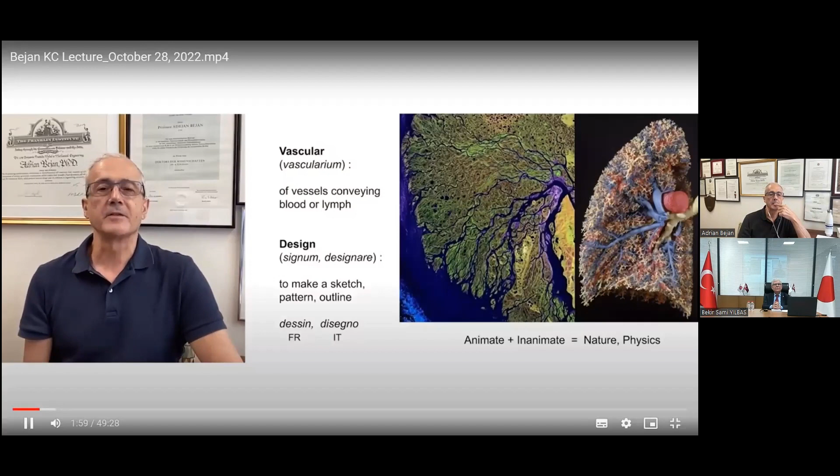The two photographs on the right make the point that the vascular design is at all scales that we can perceive. The river delta and the human lung convince us that vascular design is everywhere. And because of this, vascular design is uniting the animate with the inanimate. And this means that vascular design represents all nature, which means physics.

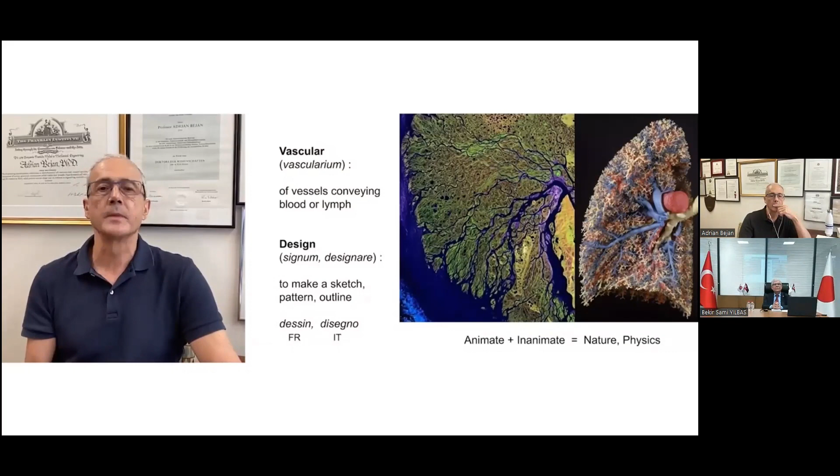A few words about myself. All research, especially the original one, is autobiographical. My own involvement in porous media research has been a series of very fortunate accidents. I spent 8 years at MIT as a student. In my graduate work, I was designing and building and testing a superconducting winding that was bathed by flowing liquid helium and also rotating at 3600 RPM. You see a sketch on the right.

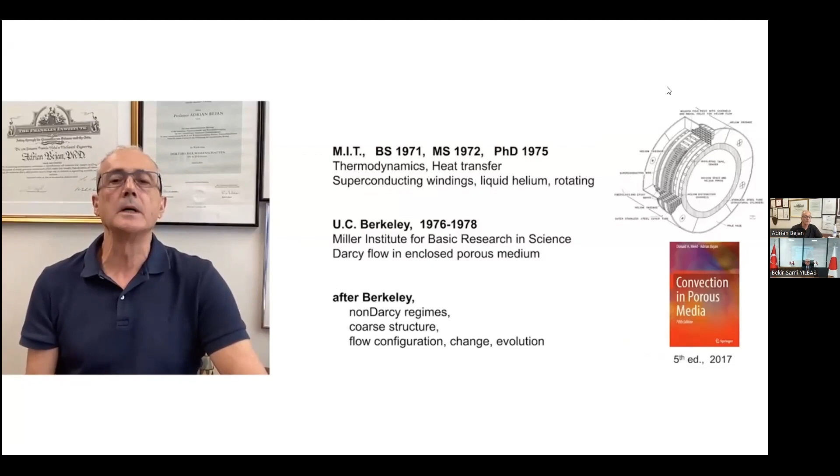2 years after that, as a Miller Fellow at the University of California, Berkeley, I had the great fortune to be hosted by Professor Chang-Lin Tien, who introduced me to the science of flows through porous media, specifically Darcy flow. And then after Berkeley, I continued in that direction with fundamental studies on other regimes, non-Darcy and higher Reynolds number, and also porous media with coarse structure.

I found myself attracted by the importance of flow configuration, which means design, and the evolution of that in the direction of endowing the system that relies on flow through porous media to have greater performance.

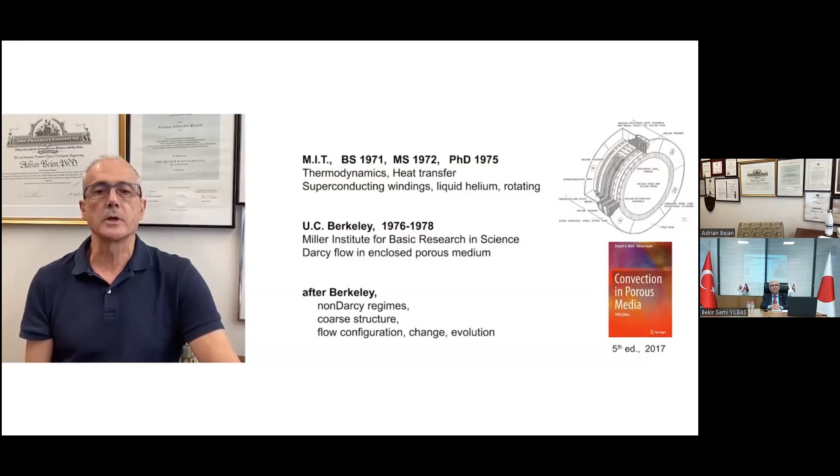Along the way, with Don Nield in New Zealand, we actually wrote this book called Convection in Porous Media, which now is in its 5th edition.

One example from my beginnings in this domain has to do with natural convection in partial enclosures. It's called partial penetration of natural convection. You see here two things: the orientation of the system matters, but also the aspect ratio of the system decides whether the entire body is penetrated by flow. That means the performance of this cooling flow is dictated by the configuration, not only by the properties of the porous medium saturated with flowing fluid.

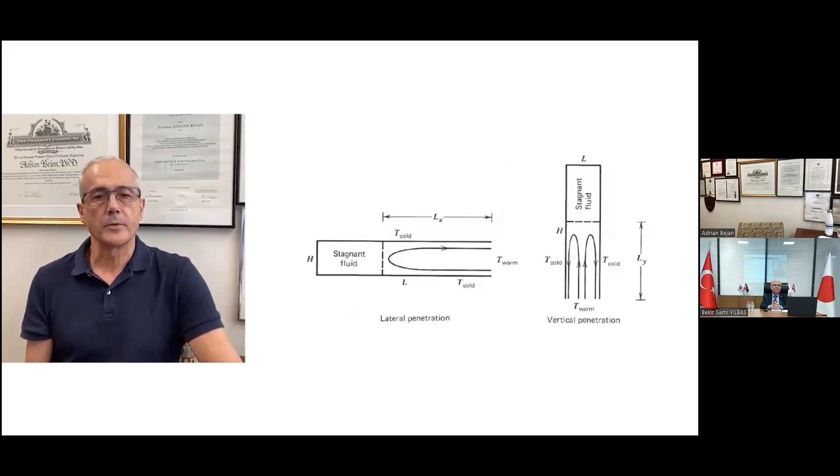Speaking of autobiography, I'm amused to remember that I made this drawing, the one that looks like the eyes of the cat, with India ink and with many French curves, meaning by hand, not by computer.

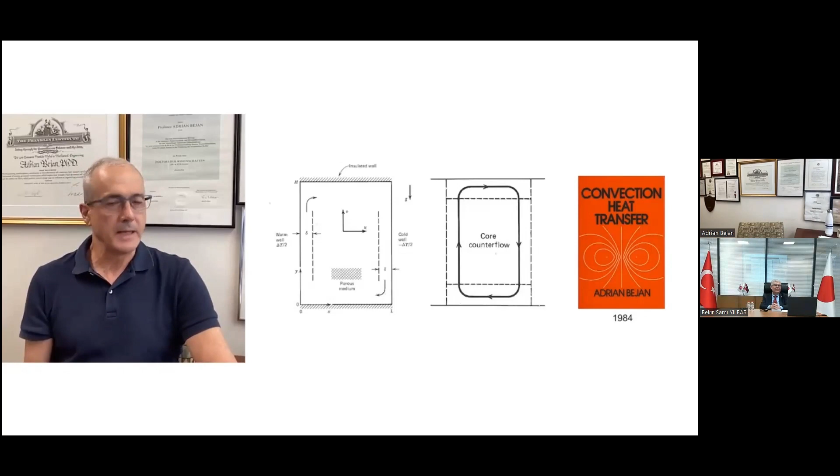Now, the real story. Predicting design evolution, once again, begins with the meaning of the words. To predict, one needs a reliable mental viewing, called an idea, of how something should be. This is very important. To know how something should be is to know the future of that something before you look at it. For that, you need a reliable principle, a law. To predict is theory, and theory is not to be confused with empiricism.

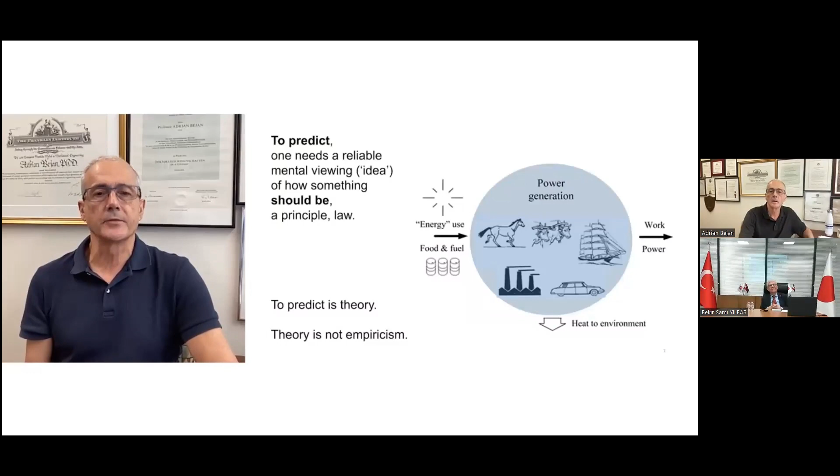In the blue domain, we have a single image review of where movement comes from: an energy source that pushes an energy current through a flow architecture. There are many of these architectures in the blue. The architecture is actually an engine that delivers work to some entity that's part of the ambient, and rejects the difference between input and output as heat.

The next part of the physics is that nothing moves unless it is pushed. So you see here the engines in the blue domain; the produced work, or power per unit time, is in fact responsible for moving something on Earth. And that movement dissipates the power. You can see the conservation of energy from left to downward in the drawing.

You don't see the second law, except to notice that the movement from left to right proceeded to a distance, that was, of course, in proportion to the work that was delivered to the mover.

The other part of the picture is that from time to time, the configurations that populate the blue domain and the green domain are morphing. They're evolving, they're changing all the time. What I sketched in the rectangular dashed box is true of everything that a human being can perceive: the air and oceanic currents, the animals and the vehicles, and many other things that appear today in neologisms such as live matter, robotics, sustainability, life, and climate.

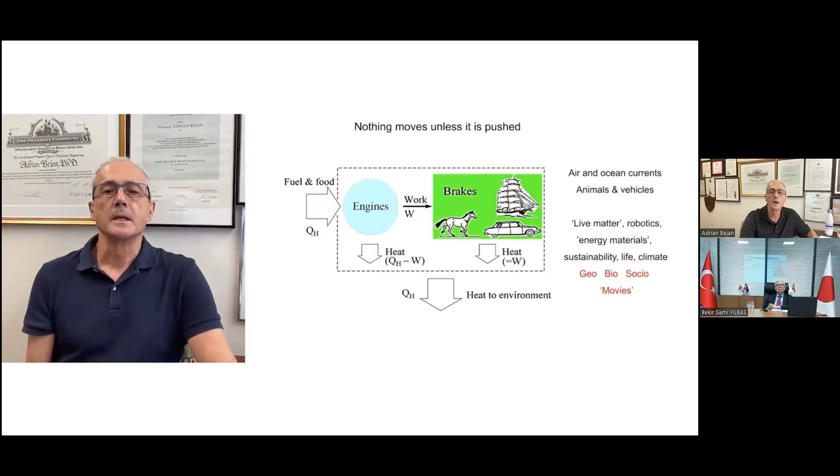This reality has a one-phrase summary, which I wrote in 1996. I call it the constructal law of design evolution in nature: for a flow system to persist in time, and that means to live in thermodynamics, it must evolve with freedom such that it provides greater access to what flows.

I illustrated this particular statement with three images from the movie of a river basin on the floor of a laboratory. From moment to moment, the tree-shaped flow changes, but it remains a tree. And from left to right, that tree flows more and more easily, which means in this particular case it is driven by gravity, by shorter and shorter peaks of sand on the floor of the laboratory.

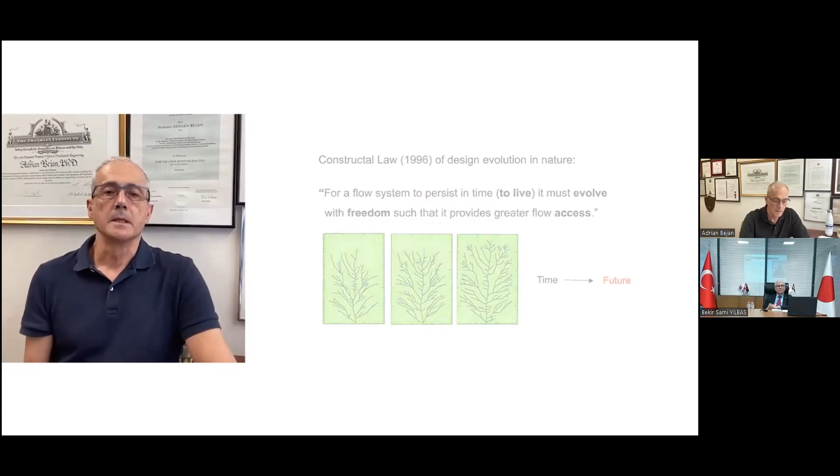With this introductory set of definitions behind us, I come to vascular design and its usefulness. Vascular design is useful because it facilitates the flow or the transfer of something that flows by diffusion on areas, in volumes, and in societies of animals and people.

And the flow, in the examples I've shown you so far, is arborescent. This point of view of how the arborescent architecture is predicted came from stating, in 1996, the problem of how to facilitate flow from one rectangular area to one point. This is the problem sketched in the upper left rectangle. The answer is by shaping the rectangle in a particular way, which happens to be the second rectangle in the column on the left.

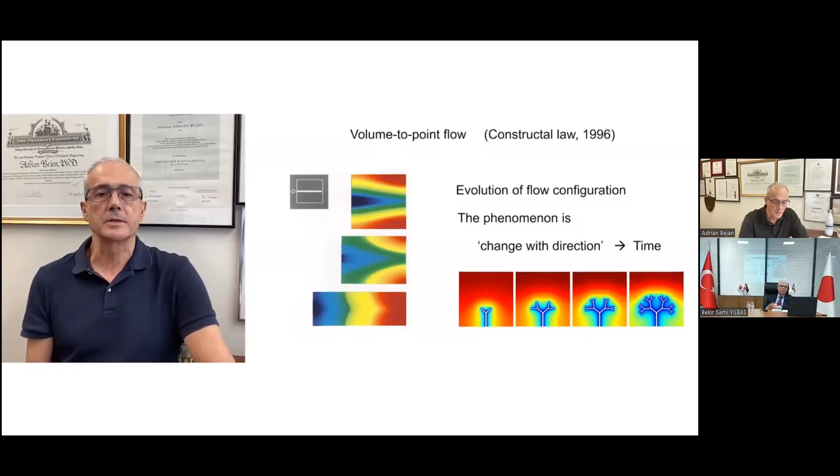The phenomenon is, once again, the change in the shape of the image in a particular direction over time. This development has been running its own movie, as you see in the lower row of images, toward more complicated arborescent architectures that facilitate flow from a rectangle to a point.

Here are a few more examples. On the left, the domain is square, it generates heat, and the cooling is arborescent—arborescent channels carry a coolant that enters through the center of the square. In the middle two columns, which show a cut through a wall that's heated intensely from the left, the cooling enters through channels from the right.

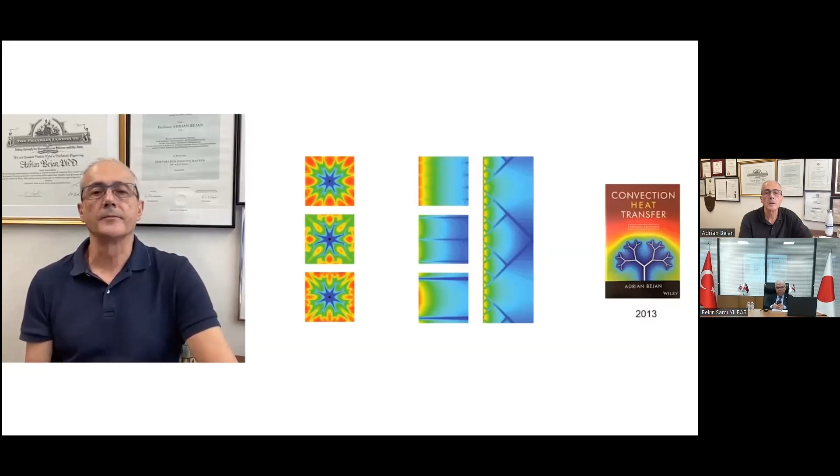In one case, the channels are parallel slits. In the other, they are tree-shaped channels. And those are arborescent architectures coming from the mind and then from computer simulations.

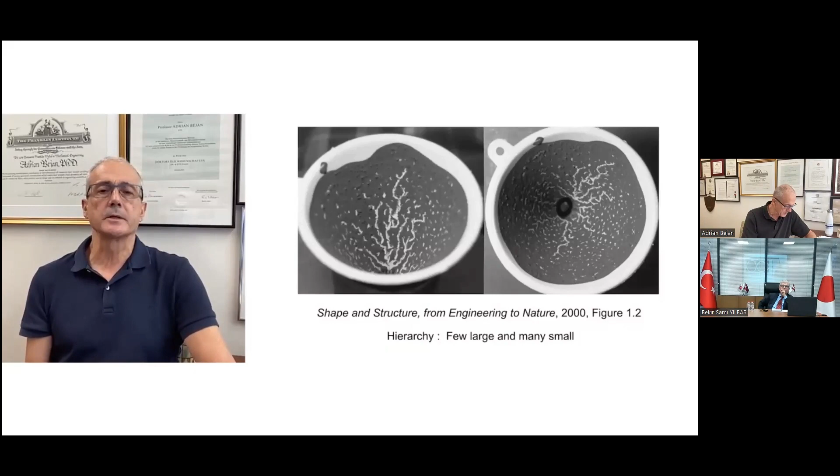You can admire these things in your own kitchen experiments. This is my own experiment in the kitchen with coffee grounds from making Turkish coffee, on the inside of a funnel. You can see that the draining of water from the saturated porous medium is accompanied by erosion, and the erosion creates an architecture that resembles a river basin.

And that is an illusion, because the original material was unknown to the flow before the flow started to erode it. However, in every single case the architectures are trees, and the principle that gave birth to every single image in this running movie is a single principle—this principle of evolutionary design with freedom.

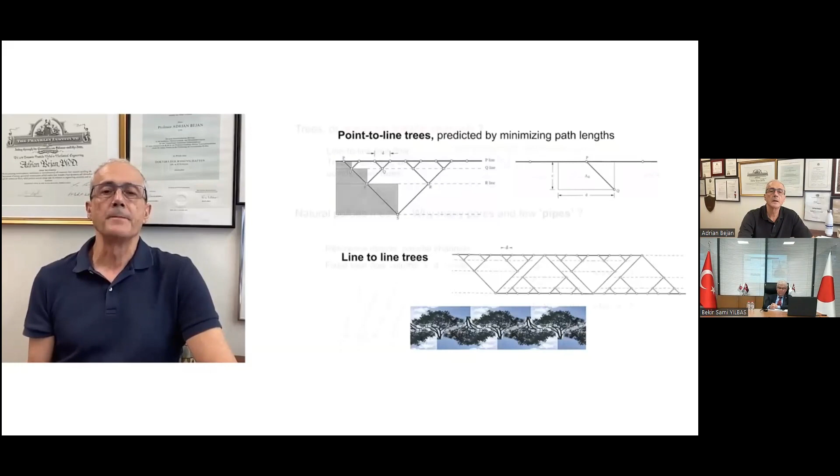If the problem is to engineer flow access between two parallel lines, then a first step toward an answer is to have the design from the top alternating with the same design upside down. This leads to the question: does the design with alternating trees offer greater access than the much simpler design shown at the bottom, which consists of parallel channels connecting the top line with the bottom line? It turns out that the alternating trees are considerably more permeable to flow.

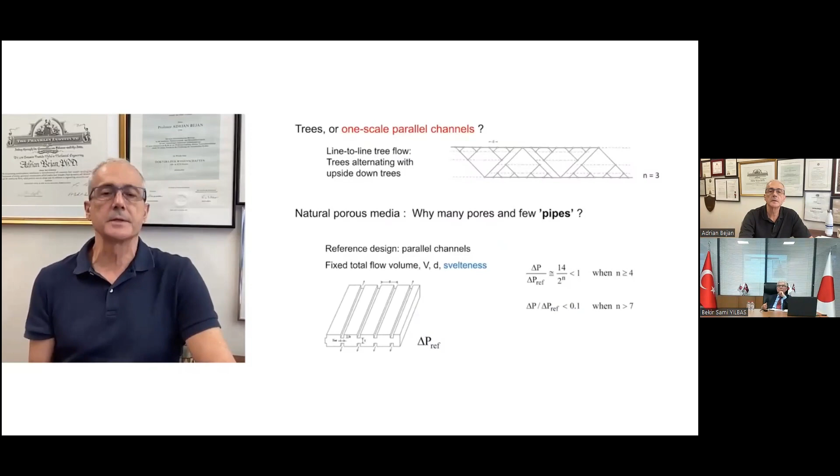This occurs when the number of their levels of bifurcation is greater than 4. Presently, in the upper drawing, the number of levels of bifurcation is 3. So the arborescent architectures are everywhere.

For example, in every living organ, such as muscle, there is a volume made by one stream entering as arterial blood and exiting as venous blood. As shown with red and blue, the body is inhabited by two trees, meaning a vasculature consisting of two trees matched canopy to canopy. Imagine two trees sharing the same canopy—that is the vascular design of the living organ.

The middle and right drawings show more of a property of a flowing design: the property of svelteness, a number that accounts for the relative thinness of the channels that carry the flow. You'll see very soon that this thinness or lightness is very important when it comes to transporting the organ on a greater system, animal or vehicle, that needs that organ.

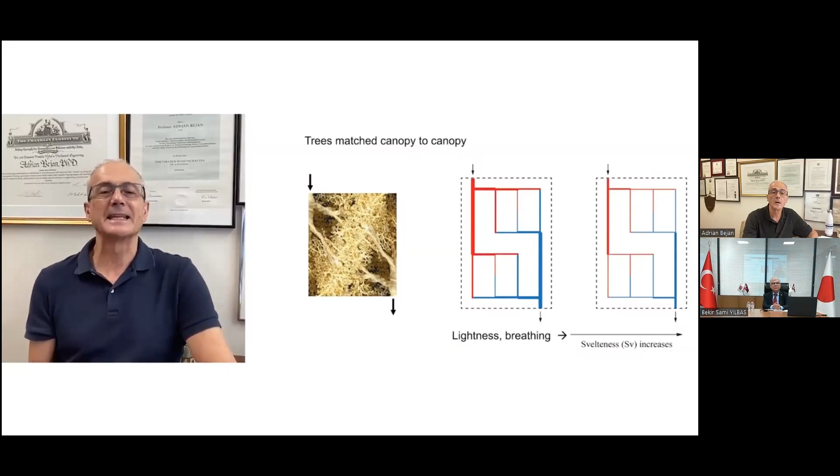Here's another benefit from getting to know vascular design. In evolution, if you read the news, there's constant surprise that species vanish and new species appear. Evolution, most of it in the imagination of the biologist, is of two kinds: gradual, often imperceptible changes, accompanied by relatively dramatic-looking changes. I mentioned that species are vanishing.

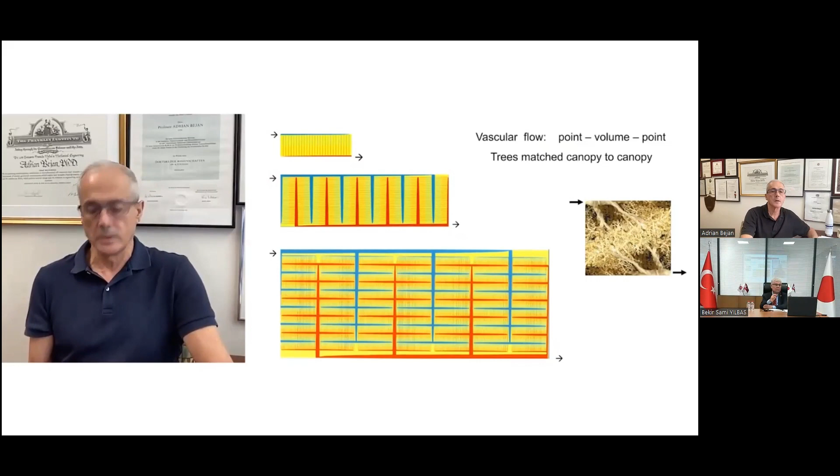Of course, in nature, these 90-degree angles between mother channels and tributaries don't happen. Those angles themselves come from freedom to change in the direction of offering greater access, and this is why the angles have relatively precise values if you know the principle of evolutionary design.

Finally, this idea could be taken with ease in the other direction, into a three-dimensional object. You can see in the middle drawing the yellow element bathed in the manner I've shown several times in the preceding slides. More elements fill a volume in the third direction, indicated in pink. Larger three-dimensional bodies are bathed by a single stream with two trees matched canopy to canopy, as shown in the construction in the column on the right.

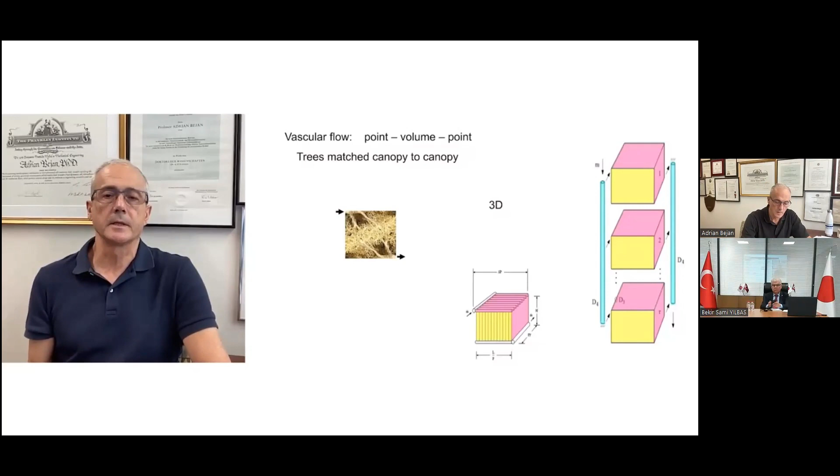Vasculature is not necessarily tree-shaped—it can be much simpler. You can imagine a body filled with trees that have a single channel. That's why I introduce you now to vascular design consisting of spacings and inserts.

For example, a body that generates heat from many plates spaced uniformly through the volume, cooled by natural convection from below. The architecture has a single degree of freedom, which is the spacing between two adjacent plates, and it also has performance.

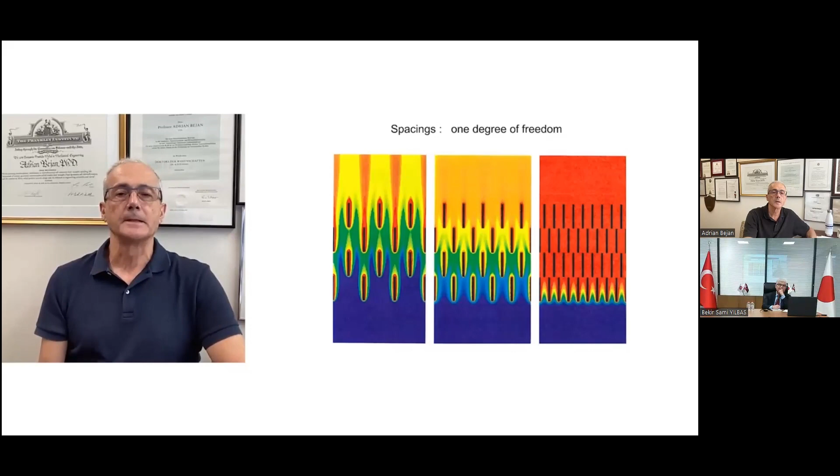If the objective is to cool the whole body, then the drawing that's coolest is the one in the middle, and that is due to the spacing, which is a single degree of freedom.

Now the principle behind the spacing, if you imagine what goes on between the plates, is that the boundary layers coating each plate do not interfere with each other—they touch only at the exit. That means the spacing is dictated by the thickness of the boundary layer, or that the length of the plate is dictated by the entrance length of the flow.

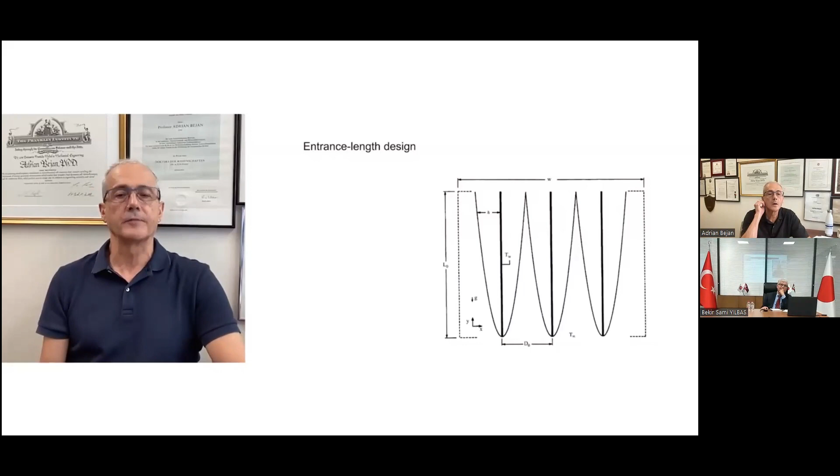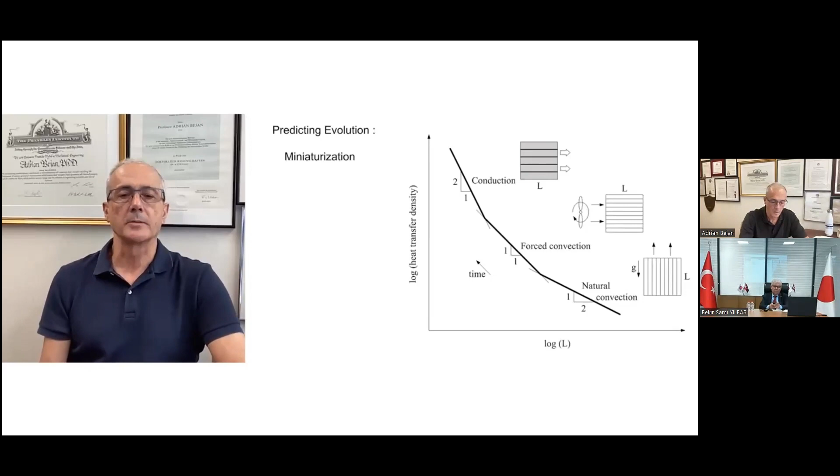Miniaturization is another name for the direction of evolutionary design in this interesting combination of gradual change accompanied, or interspersed, with dramatic changes.

Why is the designer and the user interested in smaller bodies with coarse porous structures with fluid flowing through them? Well, because once again, those organs are useful on something else much bigger: the mover, the animal, or the vehicle.

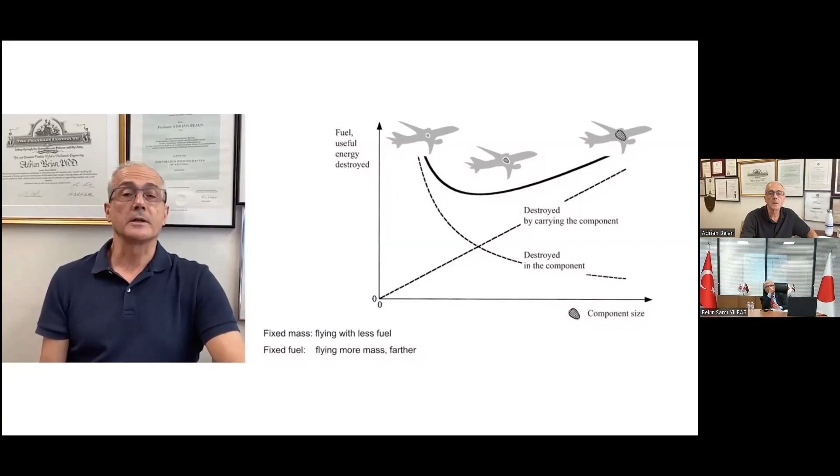Now, why is this so-called preferable size of the organ decreasing over time? Well, it does because the descending curve slides downward as one era is replaced by another. It slides downward because designs are actually improving.

For example, in technology, the flow architecture gets better if one learns that the vascular design is better than some other designs. And because of this migration of the descending curve downward, the intersection is also migrating downward, toward not only better performance, but also smaller sizes.

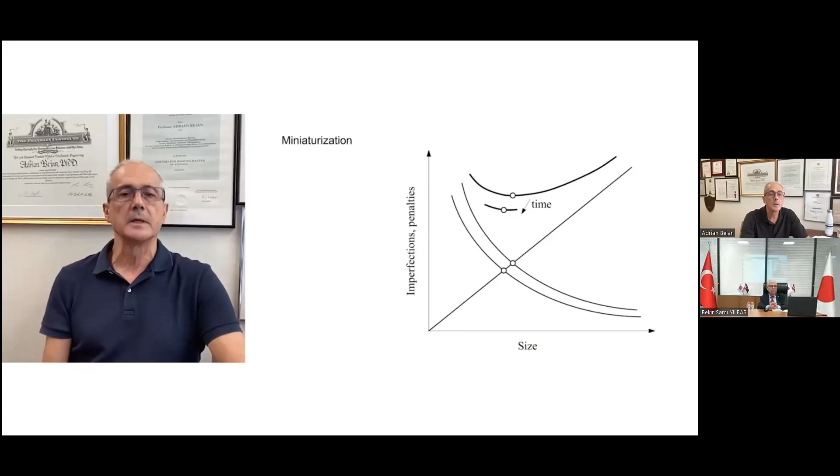So the future of a technology is in the hands of the person who knows the principle of design evolution everywhere.

The largest domain that could use what I'm sharing with you today is that of structures for heat exchange or mass exchange.

Heat exchangers are a very old—actually only 200 years old—domain, but it is of course much older in nature. Although I have to tell you that what I'm going to show you next was not copied from nature, far from it. But it's important to know that what we're discussing is in fact in accord with flow architectures that occur by themselves in this direction of evolutionary design that began today's lecture.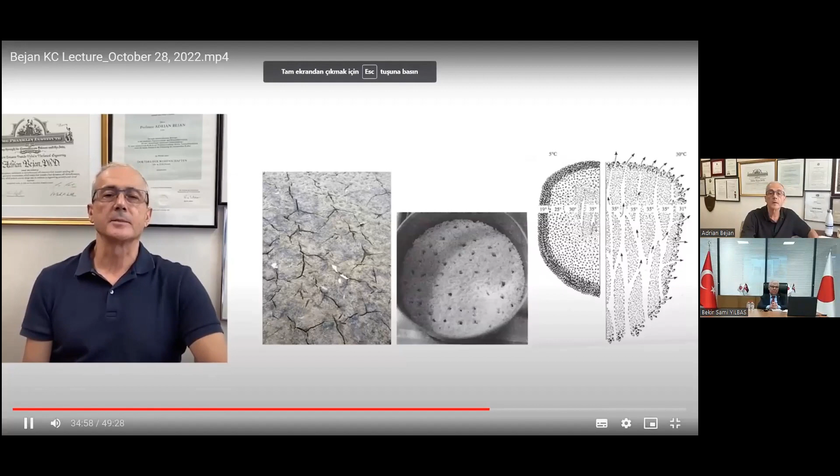Everywhere you look, you see tiny trees of cracks in the mud, and they facilitate the evaporation of water from the wet soil. In the middle photograph, you see what happens in the last stages of boiling rice, right before it becomes rice Japanese style. You see the birth of vertical chimneys that occur to channel the steam from the base of the pan to the atmosphere.

On the right, an artist's cross-section through a swarm of honeybees attached to a tree branch in India. The bees can withstand temperatures lower than 35 degrees Celsius. In the left half of the drawing, when the ambient temperature is low, say 5 degrees, the heat generated by the colony is dissipated to the ambient through heat conduction, through thermal diffusion. On the right, during a hot day, the bees rearrange themselves to permit the ambient air to rise by buoyancy through the body of the colony.

And these channels are nature's way of facilitating transfer in a body with coarse pores. In the technology of heat exchanger design, this idea has meaning: one success story led to two or three more. From left to right, the designs with one degree of freedom are accompanied by designs with more degrees of freedom, and even more degrees of freedom in 3-dimensional designs, as in the rightmost drawing of a heat sink consisting of identical pin fins.

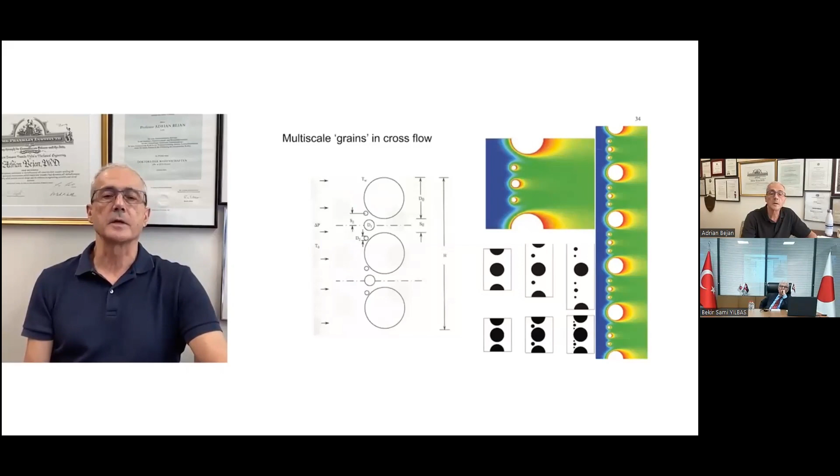Or now getting closer to the most common design of heat exchangers: cylinders in cross flow. The architecture, especially in the direction of getting smaller and smaller, looks like a multi-scale package of grains in cross flow.

Heat exchangers are cataloged, let's say historically, in images of this kind. This is from the Second World War era, primarily due to Kays and London at Stanford. The package of tubes in cross flow is complicated. In cross section, you see tubes of a particular arrangement, meaning there are many arrangements in the handbook. Each tube is covered by fins, and the fins are also an architecture with a lot of freedom to change.

The performance is summarized by those two curves. The upper one accounts for the pressure drop across the tube bank, or the appropriately defined friction factor. The lower curve accounts for the sister phenomenon, the intimate thermal contact between the coolant, meaning the fluid, and the solid surfaces. The fact that both curves descend to the right gradually as the flow rate increases reassures us that there is a so-called analogy between fluid friction and heat transfer. So this is the classical part of fluid flow and also heat transfer.

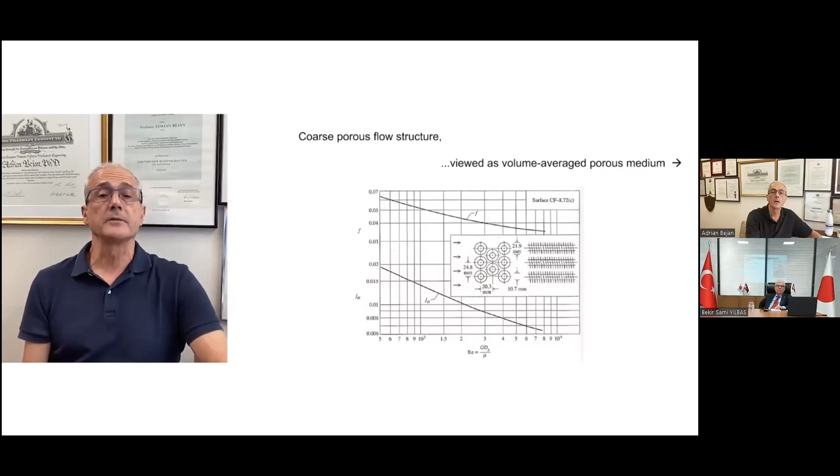It is even better known if one focuses on the fluid friction aspect, the top curve, for a single pipe with flow through it, where the coarseness is due to the fact that the inner side of the pipe is coated with roughness or protuberances of greater and greater size.

And today this is known as the Moody chart, although the data and the drawing came from Göttingen, from the Institute of Ludwig Prandtl. Prandtl is the one who made this chart famous in the first edition of his extremely famous textbook, called in English Guide in Flow Theory.

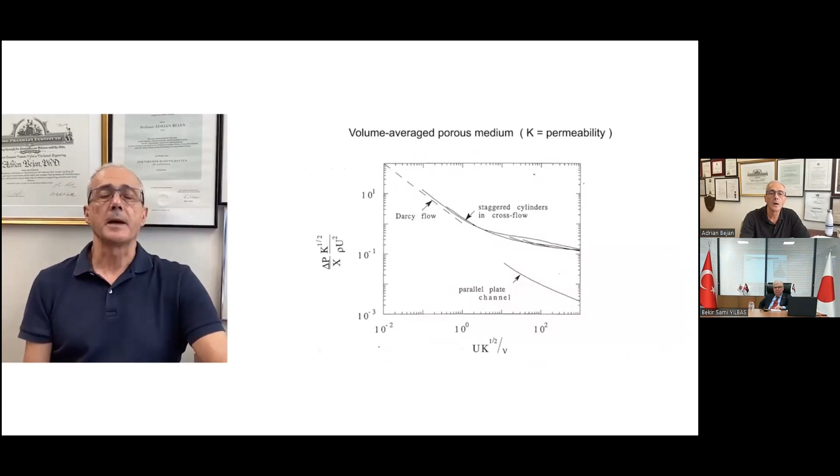Now, those of us who know fluid mechanics and how to treat it for flow through porous media can present this image, the so-called Moody chart, in a dimensionless manner, using the permeability of the porous pore structure. On the ordinate, a new dimensionless group accounts for pressure drop, and the pore Reynolds number; the upper curve is actually a bundle of many curves that account for banks of thin tubes in cross flow.

Next, the skeptics among us may wonder: why is this vascular design evolution important to me? Well, here is the answer to that. Our own life is a vascular flow through the structure that occupies the landscape.

Movement in the city is represented here as tree-shaped flows on top of such flows through the grid of the city. The grid makes us blind to the tree-shaped flow, but the crowd that converges from the city to one point of attraction, such as the basketball arena, is that river basin of human flow. At the end of the game, the same flow returns to the area as a circular, if you want, river delta.

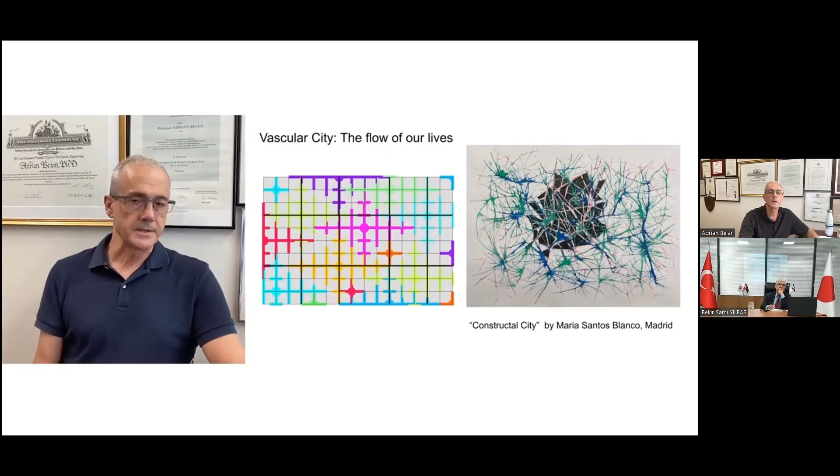This is an image of people scouring the Earth thanks to aviation. The image comes from the condensation trails left by flying aircraft. The blue shows that the whole globe has access to any point on the globe.

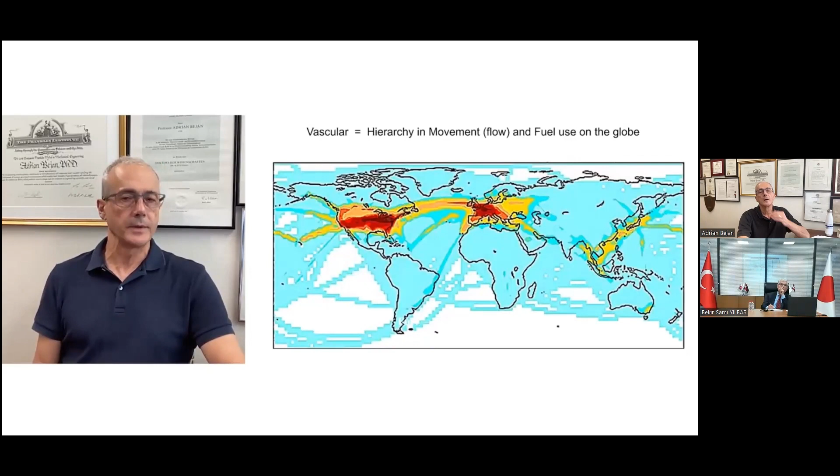However, just like the red blood cells in the circulatory system, to move from one point to another far away, the individual has to travel through the heart of the vascular flow architecture. And the heart, you see it, is where it was born, initially at small scale in Europe and North America. So aviation is a design now with a predictable past, but also with a foreseeable future.

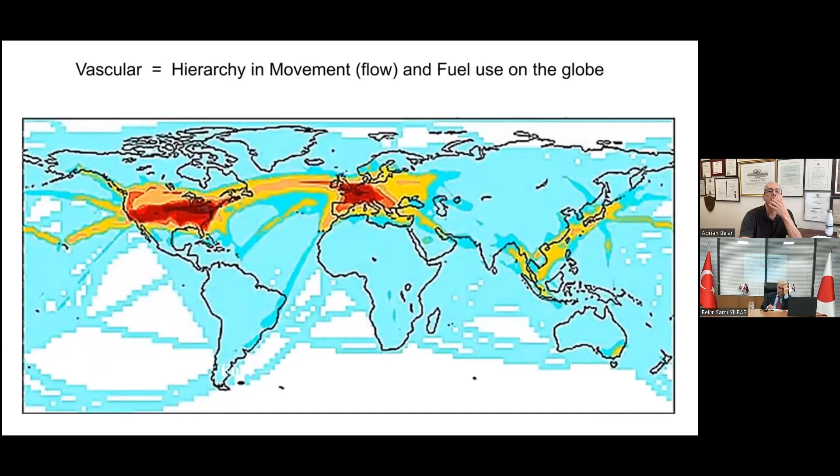The conclusion is that the vascular design is the icon for the hierarchy in the movement on Earth, and also hierarchy in the consumption of fuel that drives that movement. The next slide, let's start with the graph on the left, shows that the annual consumption of fuel is essentially proportional to the wealth of that particular country annually, called GDP, or gross domestic product. This is true for countries large and small, or groups of countries large and small. They fall amazingly on the diagonal.

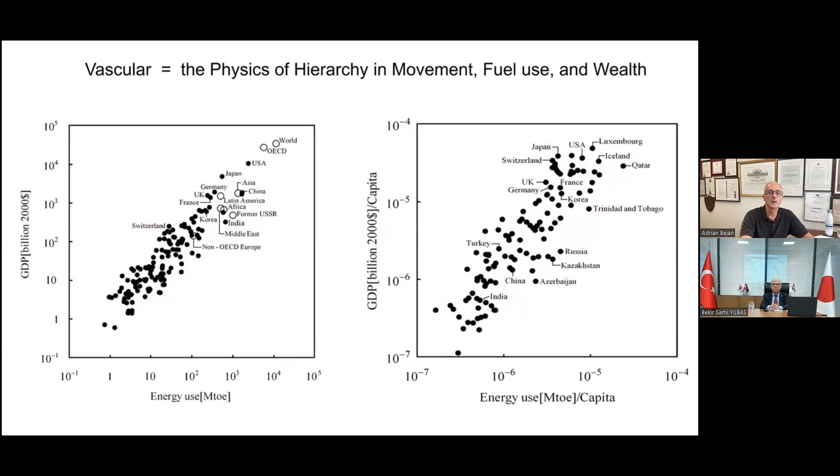In the graph on the right, the same data arranged on a per capita basis. The cloud is once again positioned on the diagonal, but it is somewhat thicker, because of other effects that you can learn if you read Freedom and Evolution. In any case, vascular design is the icon for the physics of hierarchy in movement, fuel use, and wealth.

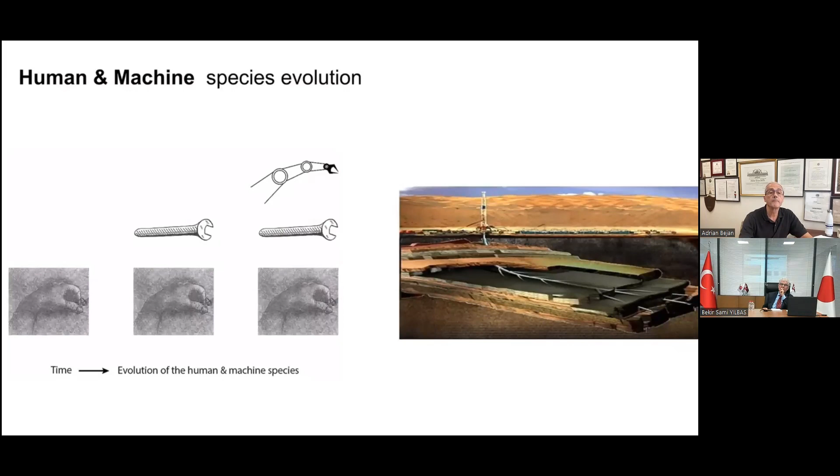And on the right, the extraction of oil from deposits in the Empty Quarter of Saudi Arabia has evolved from the single well in the 30s as a vertical shaft to the arborescent well that explores the deposits in all promising directions. So that is how vascular design predicts the future of us and also the environment in which we thrive.

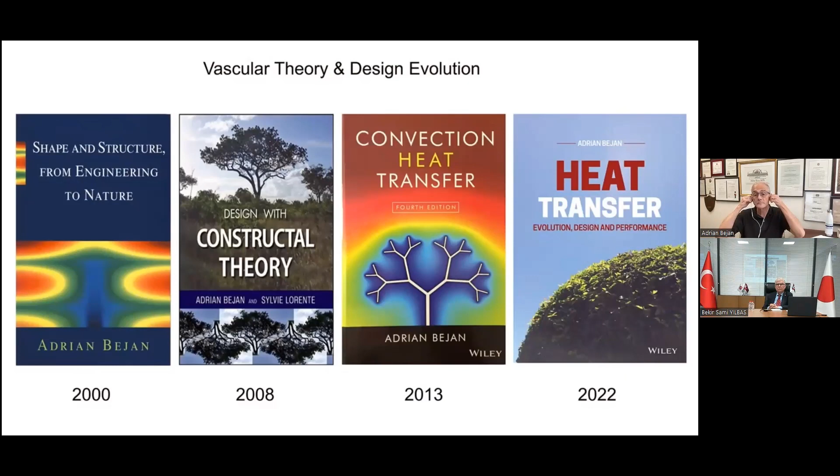To read more, I show you textbooks that I wrote about vascular theory and design evolution. The sequence of books also shows my own evolution in developing and understanding vascular design theory and application. And during the past 10 years, I've been presenting these ideas to the general public, which means that the books that I have here, Design in Nature, The Physics of Life, Freedom and Evolution, and Time and Beauty, are, in my opinion, highly recommended to your students and to your children and to your grandchildren, especially to the young who stand to benefit from better and better decisions in life.